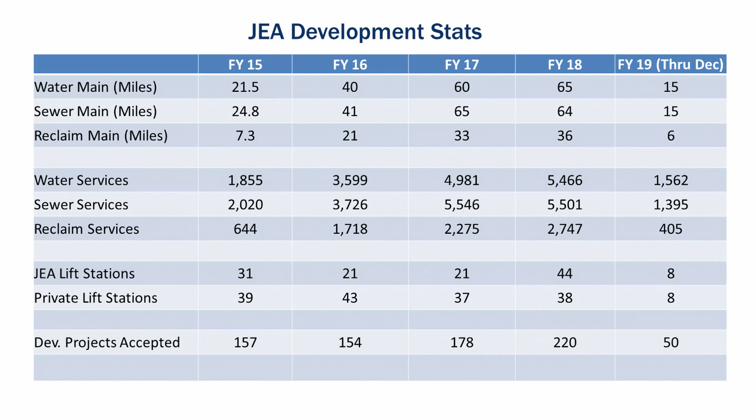Okay, like Daryl said, there is a lot that's going on, a lot of development. This just gives a very brief overview as far as the activity and the growth that we have seen. If you look at fiscal year 2015 and then fast forward to this year, it's almost quadrupled in some areas, tripled in some, quadrupled in others as far as infrastructure. So there's a lot of activities, and it's important that we keep this communication open. This is just on the water side of the business, and there's a similar story on the electric side as well. So I'm just trying to put this into context.

So we're now going to go ahead and get started with the agenda. Here is the agenda, and it follows a logical process. Basically, we're going to go from application to review to design, everything prior to construction. We're going to take a break, then go into construction, take another break, and go into more construction. Finally, at the end of this, we're going to give you information as far as what's new with our guidelines, what's new with permitting, what's new with innovation and technology that we're going to be utilizing. We want to make sure that this is interactive, so we want to have time for questions and answers throughout this session. So there is the agenda. We're going to stick to it.

And the first person who has worked very, very hard on this that I'm going to introduce is my development manager, Deanna Davis, and she's going to do section 1 or start that. Welcome.

My name is Jeremy Williams. I am the Associate Manager for Electric Services and Development Projects. We're switching gears a little bit, moving over onto the electric side of the house.

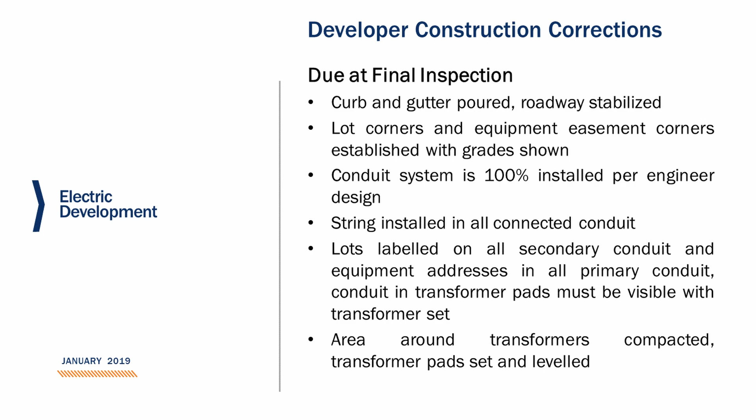The area around transformers. We get a lot of rain here in Florida, right? So if you've left the job and you're coming back for final inspection and there's been a couple of storms, there's a very good chance that pad is leaning. We want that pad to be level and at grade before we move on to the next step.

So now we've gone to as-built acceptance. Here are the 3 steps that I just mentioned previously. Do we have pictures?

Inside your concrete manholes, just want to make sure that our reducers are there if we need it, and our phases are matching up if we have 3-phase coming into the project.

Your signed and sealed schedule of values and your punch list items are all done. So as long as all 3 of those are available, your inspector will then bring all of those materials back to our project engineer here at downtown. Project engineer will then move on to...

As-built acceptance. So within 10 business days, we plan to be able to create our JEA construction cable job at that point. So now it's our turn to go in, work with our crews to get our cable scheduled, street light scheduled, and deliver our packages to our construction crews.

So the construction guys will receive the package from the project engineer within that 10 business day window. You should be getting an email or a communication from the project engineer at that point, letting you know that all of your materials have been accepted and it's moved on to the next stage, which is now scheduling for construction.

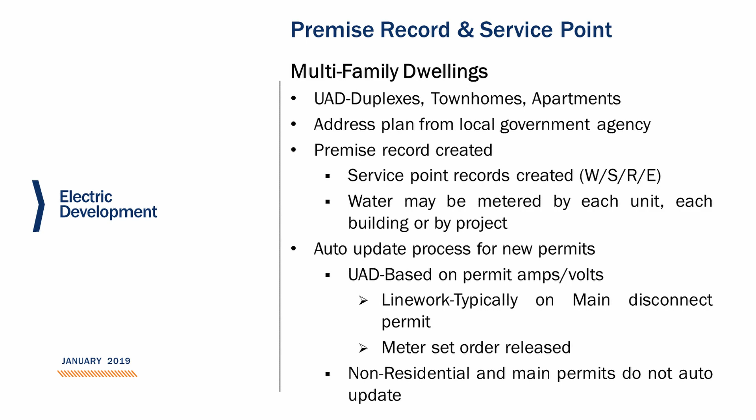For the UAD projects, if it's within that UAD boundary, they release for a meter set only. So once again, the permit is waiting for that final inspection before it actually lets that go. So once you have the permit in our system, you can apply for the service. That way it gets the right meter type. If you apply ahead of time, there's no permit information there, and it may stall the installation.

Non-residential permit, same thing, they do not auto-update. Duval County, we get a data file from them every 3 hours. We get new permits and status updates. The status updates occur automatically. The new permits are created automatically, as long as we have a matching record. If there's not a matching record, then we end up having to create a record for that permit.

St. Johns County, we get a permit data file from them once a day. It gets processed at 6 a.m. The new permits are staged, and my department reviews them, and then we add them into the system. If it's a status update from St. Johns County, and we have a matching permit number record, that permit is automatically updated to a final status, or whatever status we get from them.

Atlantic Beach, Orange Park, Baldwin, those are email. They send us paper copies, and we add them into our system manually. And they notify us manually as well with an email.

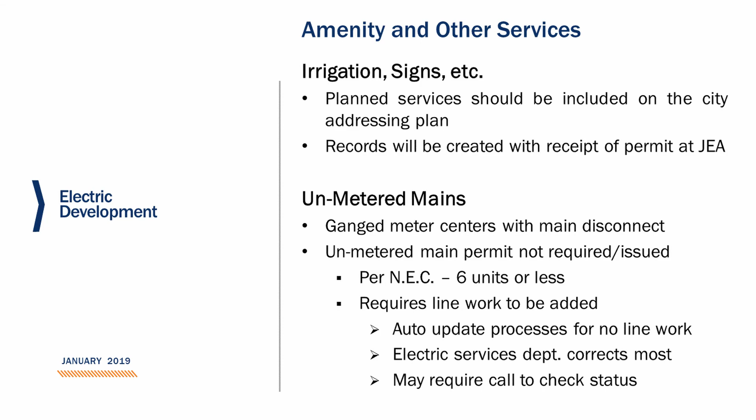The engineers review the permits and connection work that need to happen - unmetered mains, gang meter centers with a main disconnect. If you have a smaller building, like with 6 units or less by the National Electric Code, you don't have to have that main disconnect, and you don't need a main UM01 or unmetered main permit. Those require a little special handling. We try and catch most of them, and what we do is we'll add line work to one of the permits and let them know that it's a gang of 6 meters, and they're making the connections for that in the transformer.

Rules and regulations for electric service, we got that at jea.com.

Frequent issues that could possibly delay the service - a few years ago, probably 5, 6 years ago, they started requiring conduit installed in every string installed in every conduit. That was one issue that can delay stuff getting done.

With the residential permits, the first people who get to look at it really could be, because they auto process, is going to be the line crew. They'll go out there, no string, they'll put an exception on it and drive away.

Correct voltage, amps, phase, that's important. Get that right. A lot of times we'll get a permit come over for 200 amps, and the guys get out there and find it's a 300 amp service. Well, the meter shop turns it down, and it requires a different size conductor if it's a residential service.

If you got a 3-phase service, it's important to get the phase marking correct. That's another issue we have frequently. The big apartment complexes, if you got the 3-phase pad mount transformers, 120/208, that requires a 5th jaw, but if it's the single-phase pad mounts, the meter shop will not install a meter if there's a 5th jaw in there. So no 5th jaws if it's 120/240. If you have a 120/208 single-phase service, that's where it requires a 5th jaw.

Infill layouts: say I had a house on 4 lots, maybe lot 1 had my water service and lot 3 had my sewer service. Now you're going to come in and want water and sewer on each of those lots. I need a layout to show where that water service is and where the sewer service is, so my team can say lot 1 you have water, you need sewer; lot 3 you have sewer, you need water; lots 2 and 4 you need both. We make those notes and then you can go process it at the counter. It makes your time for dealing with this a whole lot faster than before, and it makes it a lot quicker for the metering teams or construction teams to go in if taps need to be made. They know what they need to do and where they need to do it.

If you have a situation where you're asking us to put in a sewer service, we are going to need a layout. Go take a look at this section for all the requirements on that layout. It doesn't need to be an engineered plan. You've got a grading layout that you have to turn into the city anyway, that's what we're looking for. But really what we need is the finished floor elevation for that house. We need to be able to tell you, yes, you can gravity from that home to the sewer service. You don't want to find out after you've paid for a sewer tap that now you've got to put a pump in to get to the sewer, or that you can't even do that. So that's to help you, that's our planning process for it.

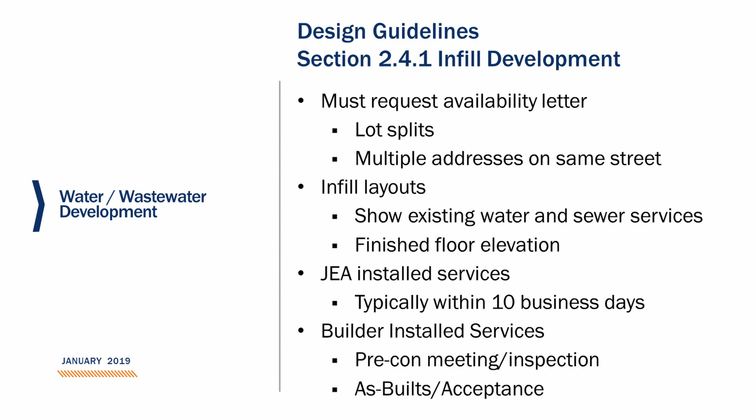So there are now 2 ways for you to get any new installed services on infill development. One is JEA installed services, typically installed within 10 business days. The process is: you give us the layout, we make the notes in the system, you go to Water Pre-Service, apply, pay your fees, the work is scheduled, and generally within 10 business days you have the services you need. There's another option now for builder installed services, which will require a pre-con meeting and inspection, and that's 24/7 inspection. Anytime your contractor's out there, our inspector will be as well.

It's also going to include as-built and acceptance, so go take a look at that section for the details. If you have any questions, you can email me. I'll tell you, it's a new process we've just put in place, so there are bugs we're working out—work with us on that, please.

Section 2.4.2, the development plan submittal. This is probably two and a half pages where you need to make sure you have this broken into general requirements, and then if you've got water, here's what you need, sewer. So here's the highlights on some of the changes.

As you guys know, you turn in plans maybe in October, and you don't get your plans approved until maybe May of the next year. You all know that your plans are based on the standards in place when you submit them to us. Now if you have an approval stamp on your plans that says May 2019, but you designed your plans for 2018 standards, you've had a bit of an issue in the past.

So what we're doing now is asking all the engineers, when you submit plans to us, put a note on the cover sheet: plans designed under year 2018, 2017, 2019, those standards. That way, through the entire construction and acceptance, we will not have issues of, oh, we changed this on the lift station, but that was for 2017 and now we're in 2018. You guys all know what I'm talking about—it's been a big headache. So this is one of the things we're doing to facilitate that being less of a hassle for you. Please put the availability number on the cover page of your plans.

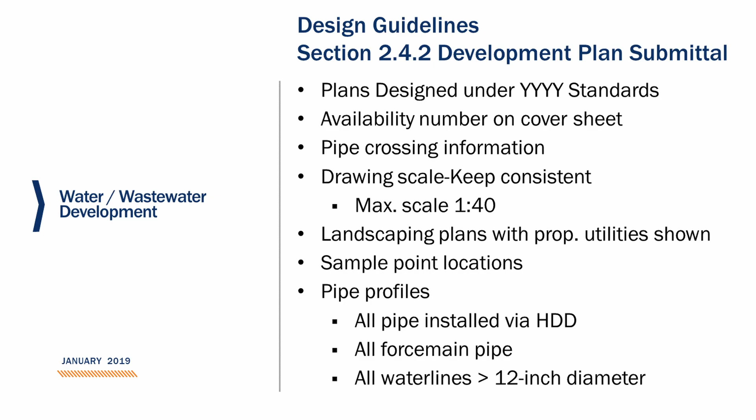Pipe profiles: every pipe that you horizontally directional drill needs to have a profile. All force main pipe you install open cut needs to have a profile. All water lines greater than 12 inches in diameter need to have a profile. I know in the past we had something like just put the finished grade and elevation every 100 feet—that's no longer acceptable. We need to have that profile, so please do make a note on that.

Section 3.1.5, flow comparison analysis. At the beginning of a project, somebody will put in a request for an availability letter and say, my flow is this. They'll design their project, here's my meter size. Then it comes time to actually pay the service fees on that meter, and it's, oh, this flow is not right, it needs to be less, or oh, this meter is not right, it needs to be less. And then you're kind of in a bind because you need your water, and we've got a whole review process that needs to go through on that.

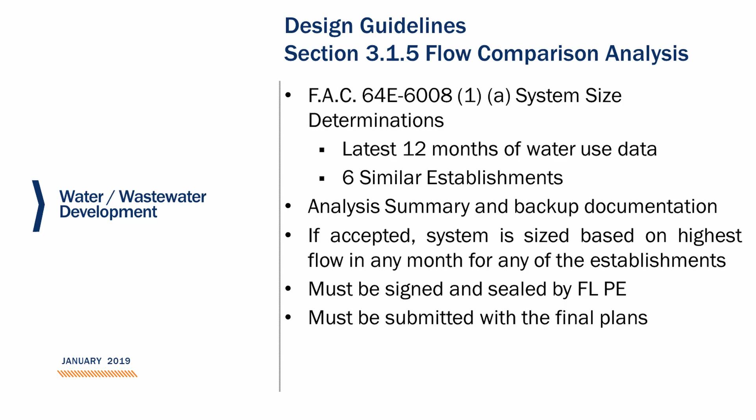So to not put us in that position, we're asking that you do that analysis during the plan review. There's a section, Florida Administrative Code 64E-6.008-1A, the table that tells you the flow if it's this, the flow if it's that. In 1A it talks about comparisons, and at a high level: latest 12 months of water use data, and 6 similar establishments in the same general vicinity.

We have had people send us stuff where one's Florida, one's Wisconsin, one's California - not the same general vicinity. Please, we will not approve that. That is not a valid comparison. So please take a look at this section and make sure you are providing all of the correct data.

We have no problem doing this, but we want to make sure you're giving us all the information we need to review and approve your request. A couple other points: the analysis summary and backup documentation needs to be included.

If we accept it, the system is sized based on the highest flow in any month for any of the establishments, not the average. That must be signed and sealed by a Florida PE, and it must be submitted no later than the final plans, because your permitted flow is going through and we're keeping track of that. So if at the last second you say, well, I said 5,000 but I really meant 3,500, now we've got to change a bunch of stuff. So let's get it done at the beginning.

You can know at that point, and I'd also recommend, if you want to know your costs - capacity fees, meter fees, whatever - you can go ask the water pre-service, use the calculators, and verify with them. So it's not sticker shock at the end. We don't want anybody in a situation of sticker shock, and we're all very willing to help you along the way to make sure those numbers are upfront for you. Please utilize us, because it's going to get to a time where you need your meter and we need to do these things, and it's not going to go fast enough for you.

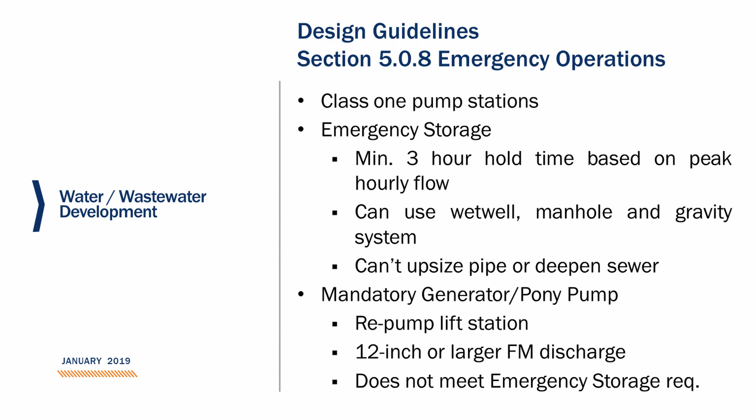But if you can meet that emergency storage, you do not need to have, generally speaking, backup power. Now, we still have situations where if you're a repump lift station with a 12-inch or larger force main discharge, you need the generator. If you do not meet the emergency storage, you need the generator. When I say generator or pony pump, it's one or the other, whichever works best for your particular situation. If you have questions, let us know.

This is an analysis that needs to be done and submitted to us during the plan review. I would personally prefer it be done during the preliminary review, but as long as it's done before final acceptance, we're good. And yes, the question I'm sure we're going to get - we are accepting revisions on anything not yet started that had to have a generator. So if you meet those emergency requirements, yes, we will review your revision, and yes, we will allow you to have your emergency storage.

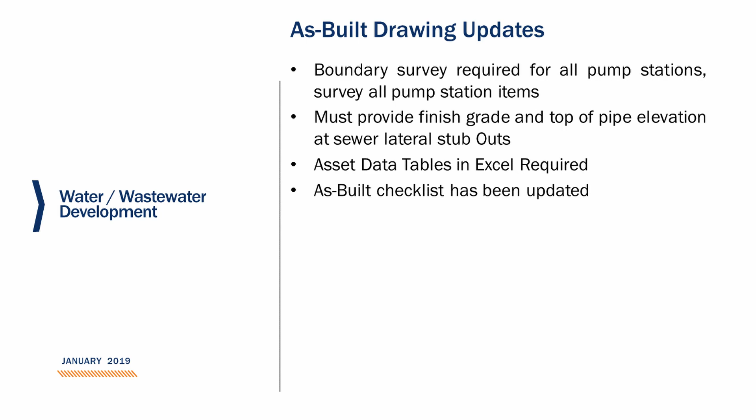You must provide the finished grade and top of pipe elevations for the sewer lateral stub outs. This is important. Asset data tables in Excel is required and in JEA format. Be sure to check the as-built checklist, it has changed, so you're not surprised by anything that you may have missed.

Okay, Kyle? Good morning, everybody. My name is Kyle Schoettler, and I am with the Water Wastewater Customer Response Team. I'm going to dive off into the special estimates.

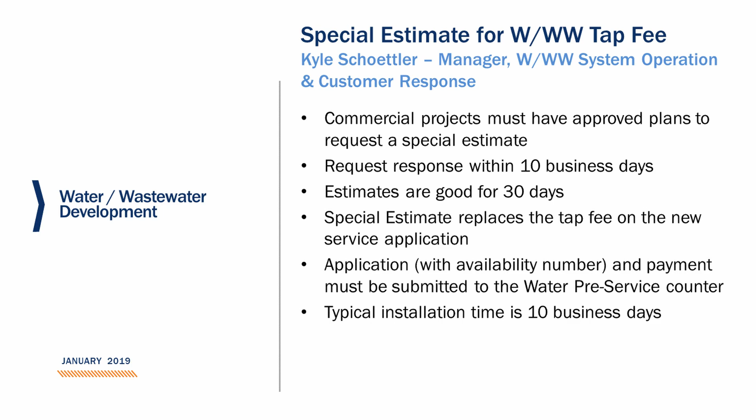Starting off on a commercial project, you're going to be required to have approved plans before requesting the estimate. The estimate you should get back within 10 days, and it is good for 30 days. Do keep in mind that this estimate is in lieu of all water and wastewater taps, standard taps. The application needs to have the availability number, and along with the payment, it needs to be submitted to the water pre-service counter. Typical installation time is 10 business days, but that's going to vary depending on the complexity and scheduling. Also, we have to do 811 locates.

When is a special estimate needed? Specifically, when a main line is 8 foot or deeper, that's obviously because of dewatering. Within DOT, St. Johns County, Nassau County right-of-ways, if it's on a City of Jacksonville pavement that has been paved within the last 5 years, or a long side sewer service, and or multiple taps. If you're requesting multiple taps within a block, all these are going to require a special estimate specifically because of asphalt overlay. We all know how expensive that is.

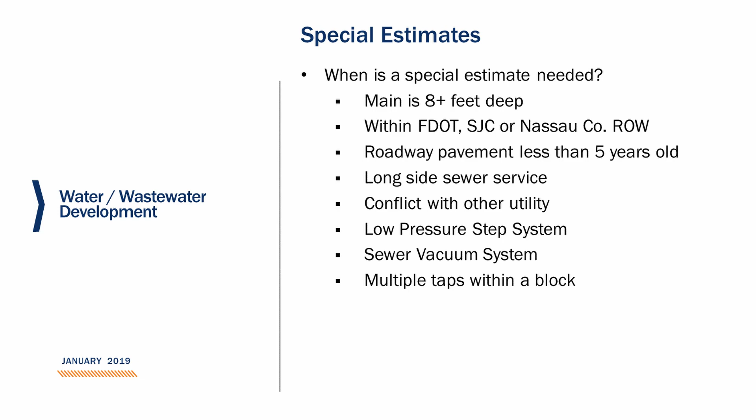Low pressure step systems, any new low pressure step systems that you're requesting, or sewer vacuum systems as well. Another conflict with utilities, cable, gas, electric, stormwater infrastructure. You got to think, if that's going to be in the way of the service tap location, then we're going to have to take extra measures to prevent it and to get you the service.

We're going to move on to the residential flow meter tests. These tests can be requested when the project that you're working on has a 2-inch main line abutting the property and it's close but over the JEA limit of service connections, which is 5 connections on a 2-inch main line, a dead-end 2-inch main line, or 10 connections on a looped 2-inch main line.

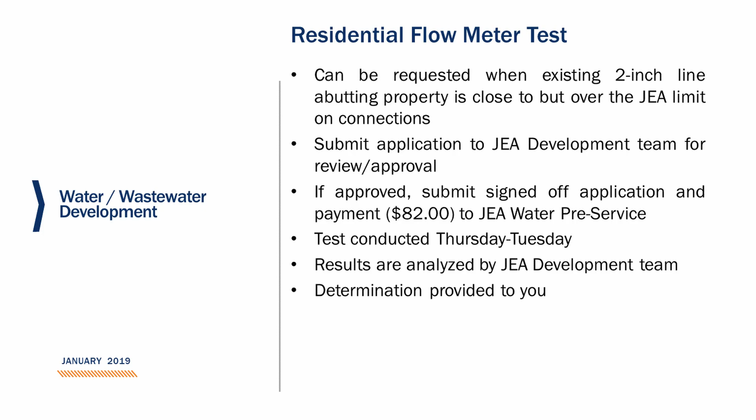This application must be submitted to the JEA development team for review. Once they have reviewed it, if it's approved, they will let you know, and you must take the application and the $82 fee, which is located on JEA.com, to the JEA Water Pre-Service Center. They will then create a work order for our field technicians to go out and perform the test, which is typically done between Thursdays and Tuesdays, because that allows us to see variations in flows and pressures on the existing main line.

These results are then given to the JEA development team for review, and they will determine whether or not you will be allowed to tie into that 2-inch main line. If there's any other questions regarding these flow tests or the special estimates, I'd be glad to answer after the presentation. Thank you.

How many people build in St. Johns County and have dealt with Trish Carroll at the building department trying to get your building permit before your construction has been accepted? Should be... oh, that's it? Wow, I thought it would be like everybody.

Okay, so just to give you guys an FYI on this, St. Johns County is no longer accepting the JEA availability letters for showing proof of JEA going to provide you service. So we have met with Trish Carroll and come up with sort of a Band-Aid solution so that you can continue to get your building permits and build before you're done with your infrastructure, and we have accepted it. So just to give you a little bit of background on that process, there are 3 ways that you can go about getting your building permit.